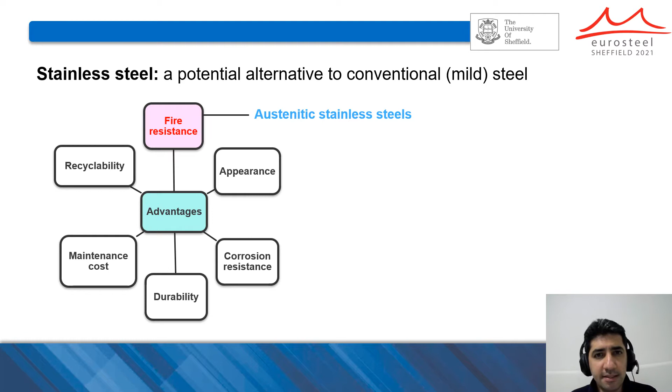An improved fire resistance is specifically observed in austenitic stainless steels with a nickel-based structure. The most common type of austenitic stainless steel used worldwide is ASTM grade 304 and its equivalent grades, as you can see in the figure.

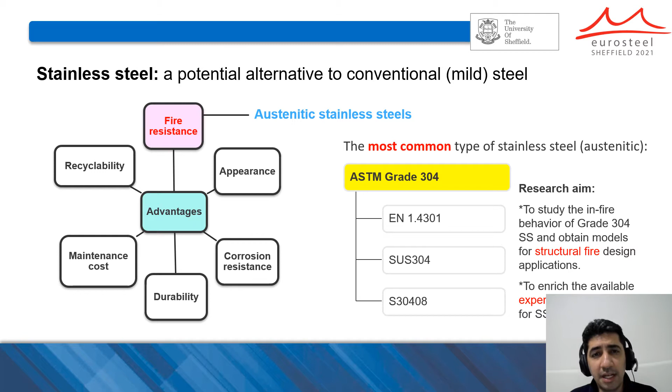The aim of this research is to study the in-fire mechanical response of this grade of stainless steel and to obtain mechanical models describing the behavior of the material at fire temperatures. The models are obtained with the aim of using them for structural fire design purposes. In other words, we want to enrich the experimental database available in the literature for stainless steel plates under fire.

When it comes to testing at elevated temperatures, we have two major approaches: steady-state test and transient-state test. Steady-state tests are more common and easier to perform, but as the tests are performed under constant temperature conditions, they cannot realistically simulate the real structural fire or the real building fire.

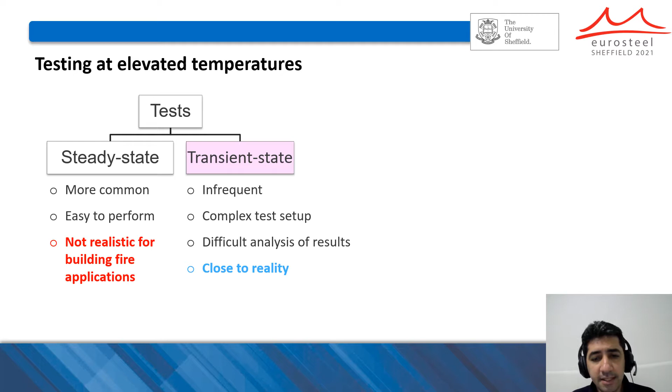So, for this purpose, transient state tests are preferred. They are infrequent because, compared to steady-state tests, they need more complex test setup, and also the analysis of results is more difficult compared to steady-state tests. However, the results we can obtain from transient tests are more realistic for structural fire design applications.

One of the complex aspects of the behavior of steels in general at fire temperatures is a phenomenon called thermal creep.

Thermal creep is the time-dependent plastic deformation occurring in the material under load at elevated temperatures. For steel materials in general, the thermal creep starts to become significant when the temperature exceeds almost 35% of the absolute melting temperature of steel. And this temperature limit is usually exceeded in building fires.

This means that to obtain a reliable model describing the behavior of material for structural fire design applications, our model should contain thermal creep strains or thermal creep deformations as well.

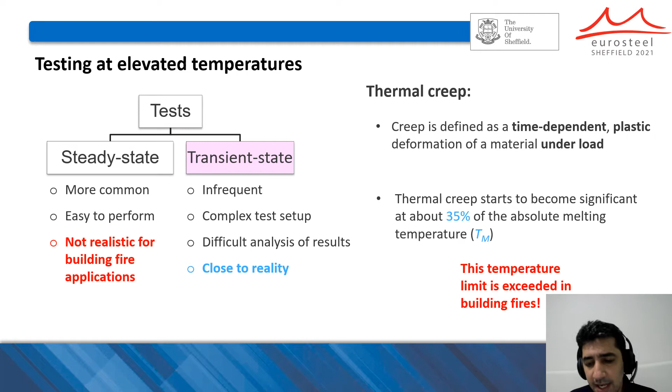As to the methodology of this study, the transient state testing approach was used. In this method, the material sample is first loaded to the desired stress level, then while the stress is kept unchanged, the temperature is gradually increased with a constant rate until failure occurs in the material.

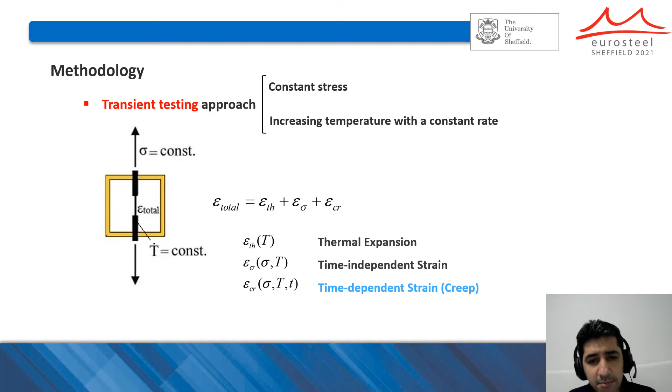And during the test, the total strain within the gauge length of the sample is measured using an extensometer. The total strain itself consists of three components: thermal expansion, time-independent strain, and also creep strain, which is time-dependent.

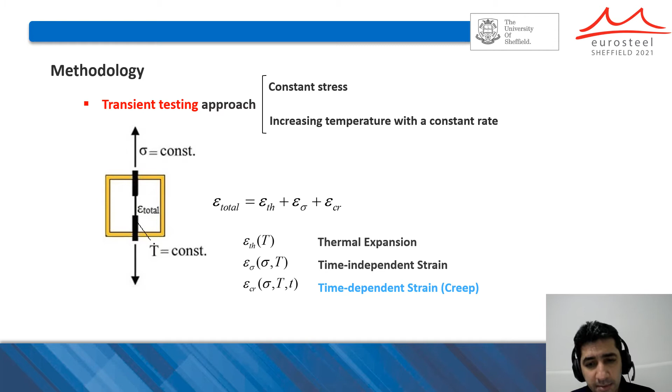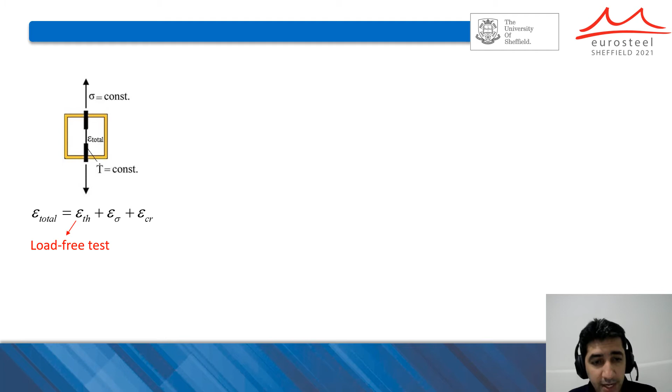The thermal expansion component itself can be obtained individually if a load-free test is performed using a transient approach. In this figure, you can see strain temperature curves in which thermal strain has been removed from the diagrams.

Under 3 different stress levels, the test has been performed. And these diagrams can be converted into multilinear stress strain curves that are more familiar for designers and engineers.

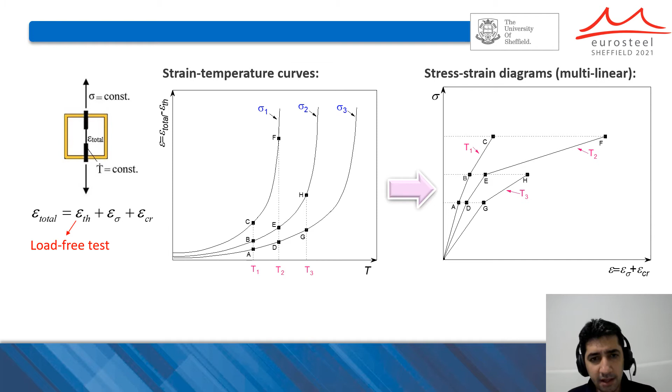The procedure to convert strain temperature curves to stress strain diagrams is shown in the figure. As you can see, at any desired temperature, for example at temperature T2, a vertical line is drawn to cut the strain temperature diagrams, and then the obtained points that are stress strain pairs are plotted and connected together to form a multilinear stress strain curve at that specific temperature level.

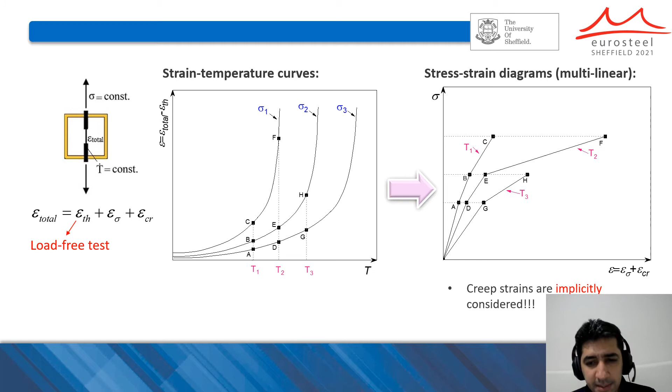As you can see in the figures, the good point is that creep strains are implicitly included in these stress strain diagrams. In the present study, transient tests were performed under 14 different stress levels, and the heating rate used was 10 degrees per minute, which represents the median heating rate occurring in building fires in steel structural members.

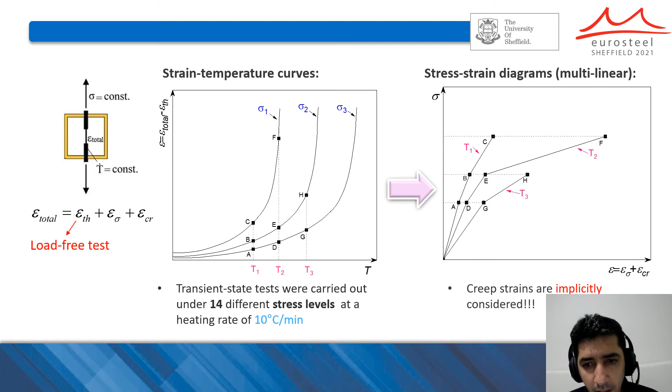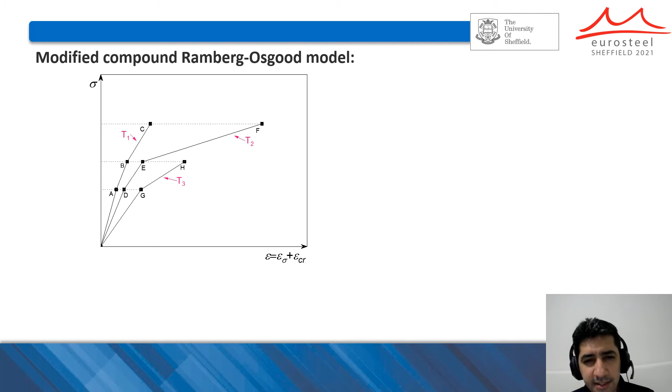Now that we have obtained the multilinear stress strain curves, they might be somewhat difficult to be utilized by designers and engineers because they prefer mathematical models. To this end, the modified compound Ramberg-Osgood model, which has already been developed for the behavior of stainless steel at elevated temperatures, was utilized and fit to the multilinear stress strain curves.

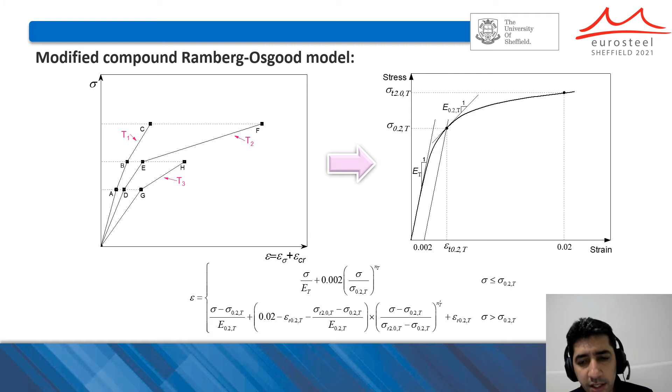Here you can see the mathematical formulation of the model and the parameters. Some of the parameters are directly obtained from the multilinear curves, and some others can be obtained using regression analysis.

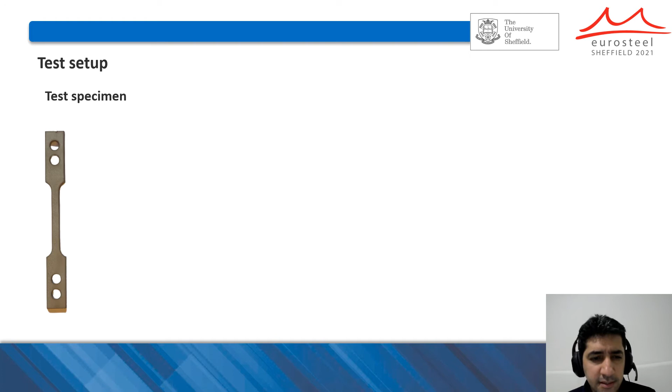As to the test setup, first the sample, the test specimen was cut from a 3 mm thick plate, and a subsized specimen was used because imposing a uniform temperature distribution over the gauge length of a subsized specimen is easier than a larger specimen.

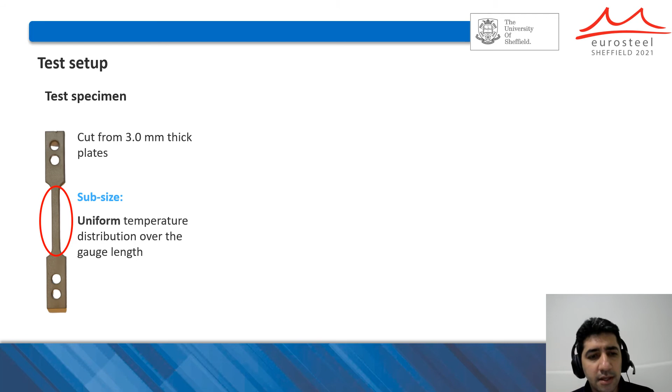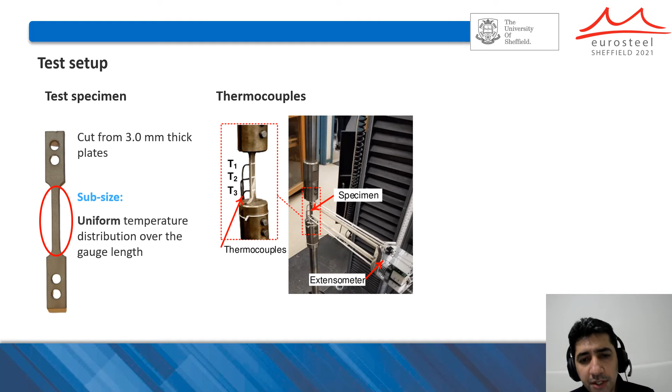You can see 3 thermocouples attached to the gauge length of the sample, and the thermocouples are directly connected to the furnace controller, so that the temperature of the sample is directly controlled. The specimen is mounted on the loading machine, and you can see the extensometer, which is attached to the sample to measure the strain. Here is the furnace, the split furnace, which is used to apply heat to the sample.

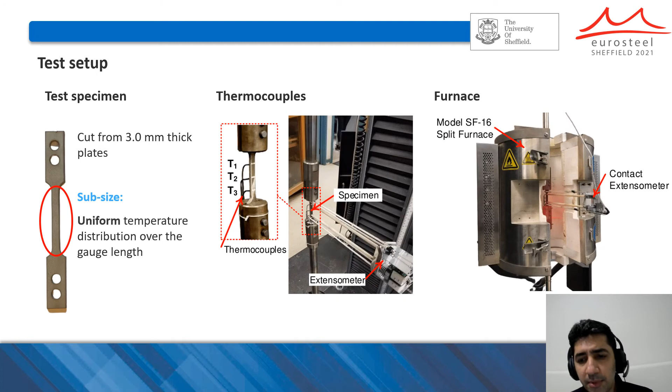Results. As previously mentioned, the thermal expansion of the material can be obtained if a transient test is performed under load-free conditions. In this figure, you can see the results of the present study for thermal expansion in comparison with the diagram presented in Annex C of Eurocode 3-1-2.

As you can see, Eurocode significantly overestimates the thermal expansion of grade 304 stainless steel plates. It is on the safe side, but there is a kind of overestimation in Eurocode.

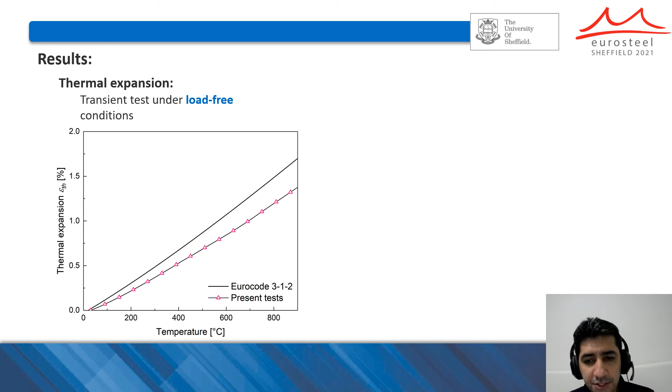In the next figure, you can see strain temperature curves obtained at 14 different stress levels. The numbers shown on this diagram are the stress levels in megapascal. As you can see here, we have some sudden jumps occurring in the strain temperature curves at stress levels greater than 150 megapascal.

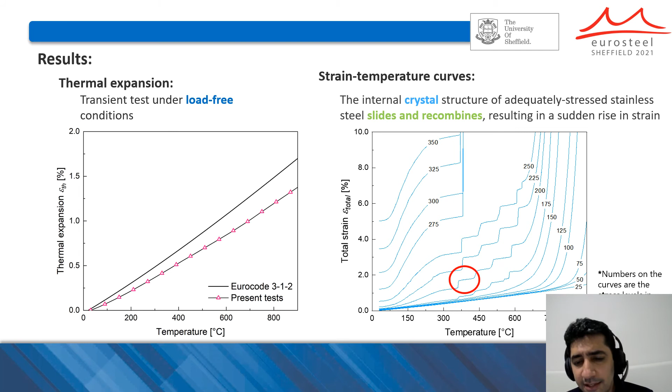The reason for these sudden jumps is because of the changes that suddenly occur in the microstructure. Actually, the internal crystal structure of austenitic stainless steel slides and recombines when a significant amount of load and temperature is applied to the material, and as a result, we can see these jumps in the strain.

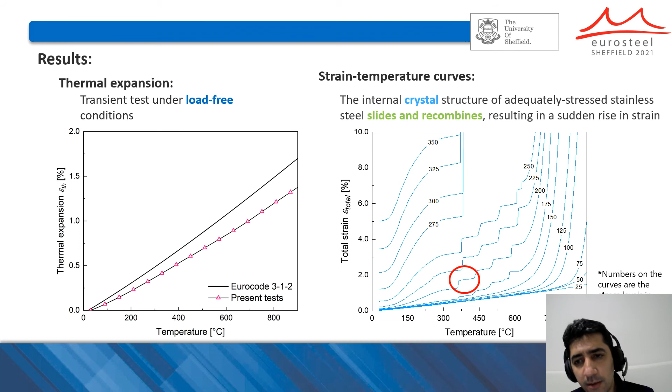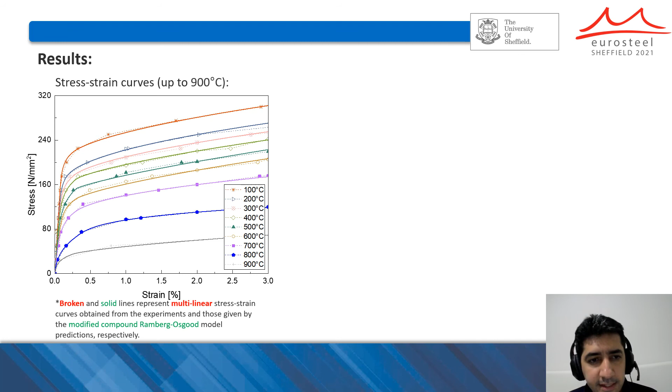Now that we have obtained the material properties, we can discuss and compare the results of the present study with the data already available in the literature. First, elastic modulus, which is the slope of the stress strain curves at the origin.

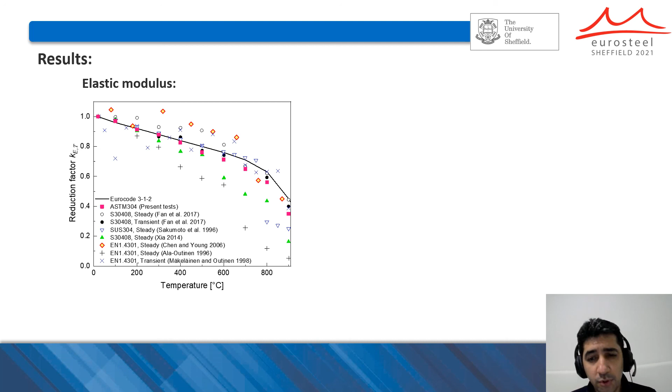We suggest that in future studies, more accurate testing techniques such as the resonance testing method be utilized to gain more accurate and more reliable results for elastic modulus.